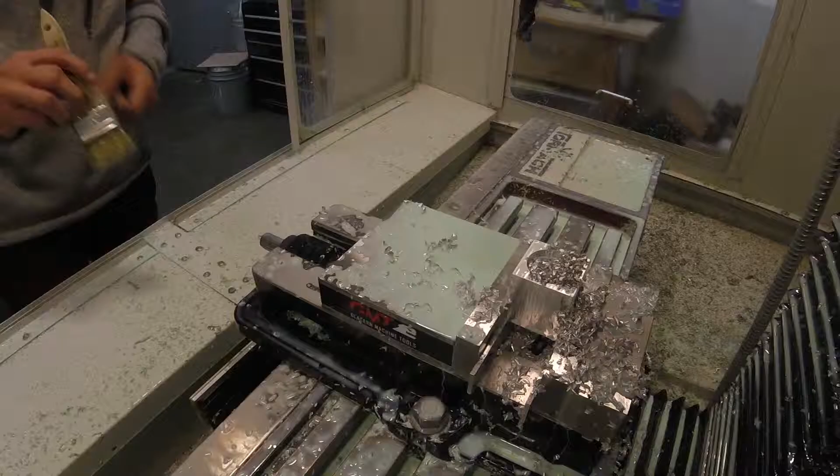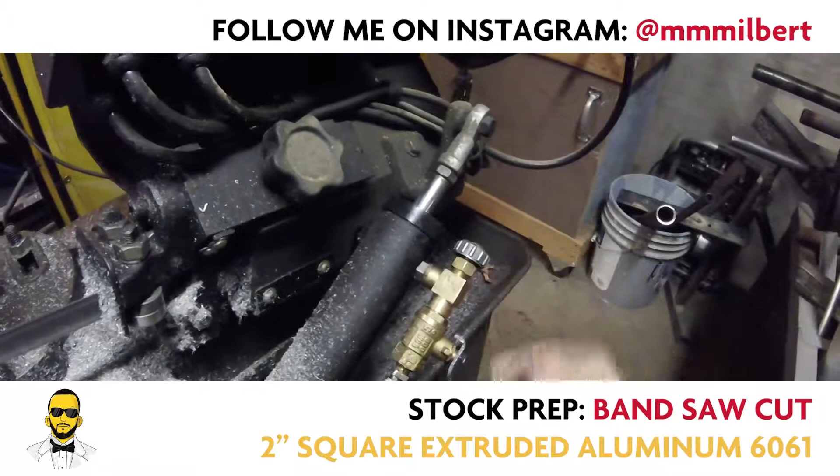Today we're in the shop milling a Turner's cube, learning how to use a CNC machine. We're on a Tormach PCNC 770. In this video, I'll share my CAD and CAM as well as my part setup, tooling, and speeds and feeds. Thanks for joining me.

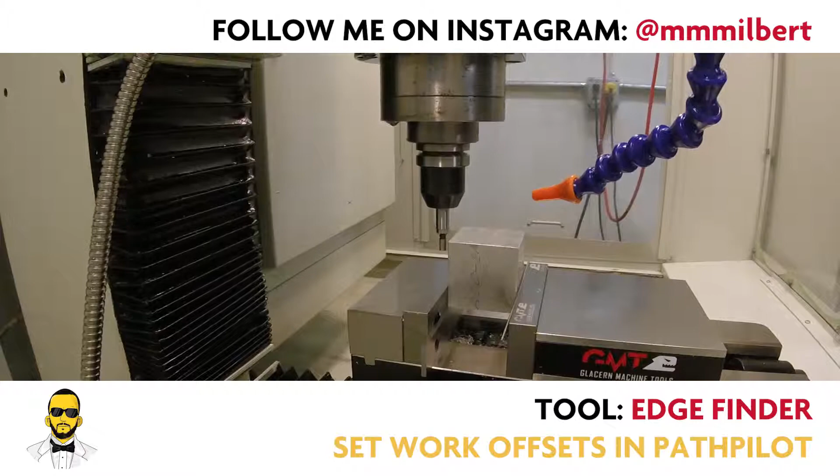I'm clamping my piece of 2-inch extruded aluminum into the vise, and I'm finding the work offset with the edge finder. I have it sitting on a parallel on one side with a piece of TIG rod on the other side, and this is a piece of advice I saw on a This Old Tony video.

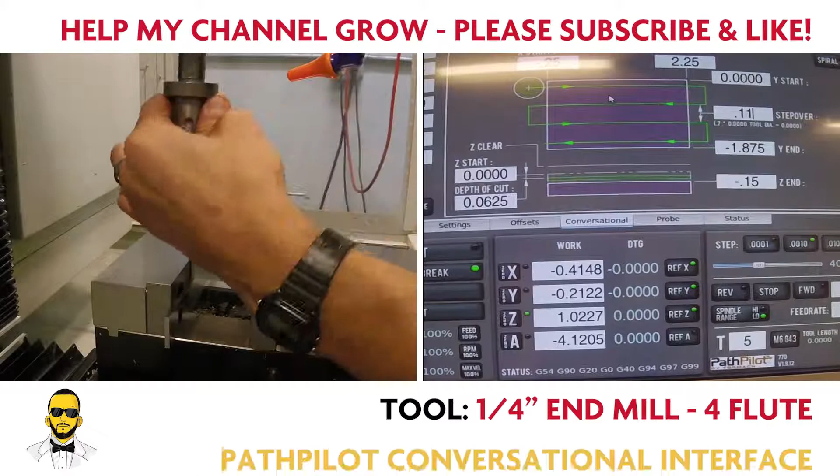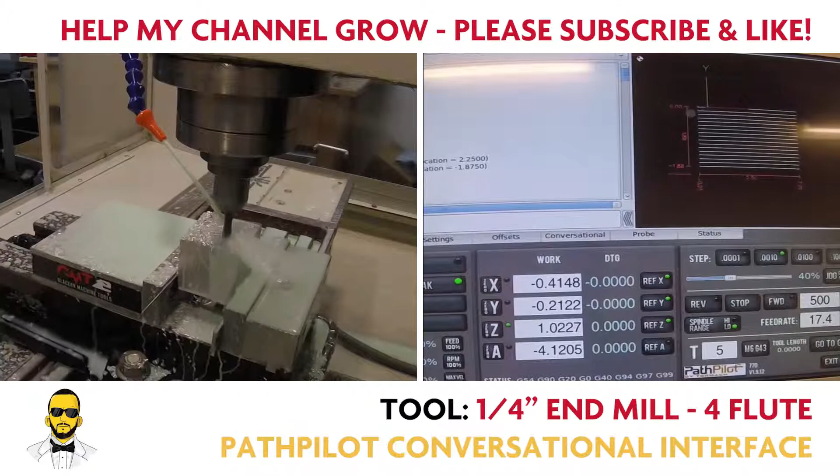I programmed the conversational interface to use the 1/4-inch end mill to face off the top of this block, and I'll do that to each of the 6 sides. For most of these operations, I'm using a 1/4-inch end mill because that's what I have. In the future, I'd love to get some other tooling like a Superfly to make a faster job and give me a better surface finish.

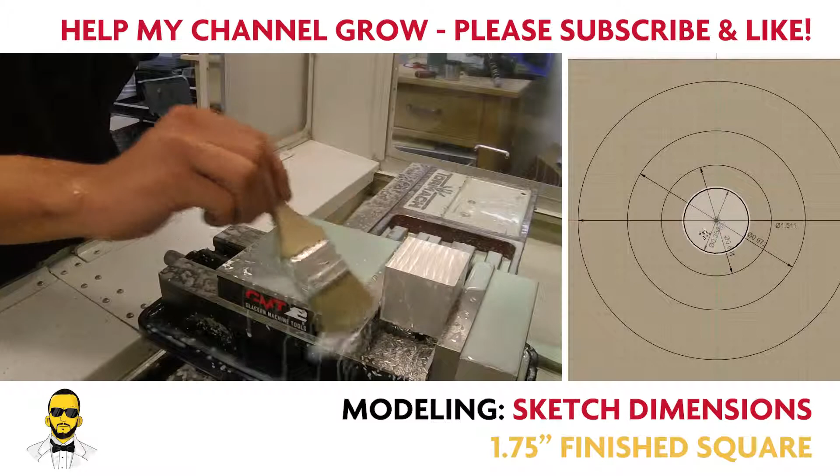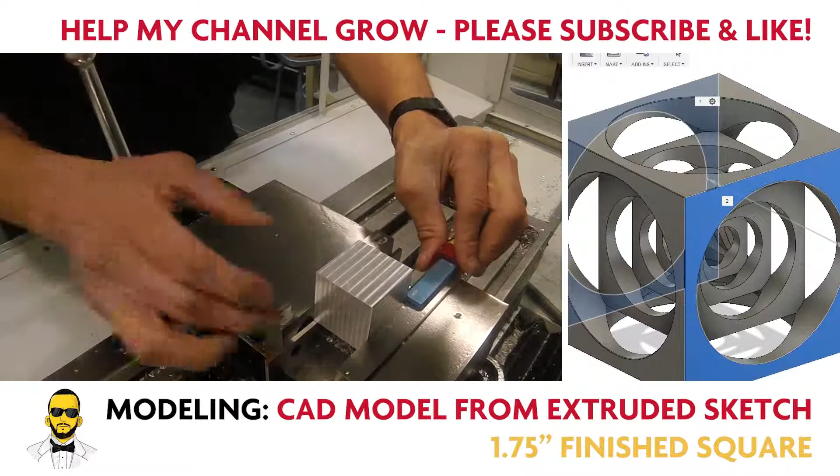I'm getting started in Fusion 360 with the sketch, and in this sketch, I just found dimensions on Google that I calculated to fit my cube size, and that's what I'm starting with. From there, I extruded the shape into all the dimensions, added some chamfers, and that's pretty much what I call my model. I'm new to Fusion 360, so I'm not going into depth on laying this out because I don't even know what I'm doing.

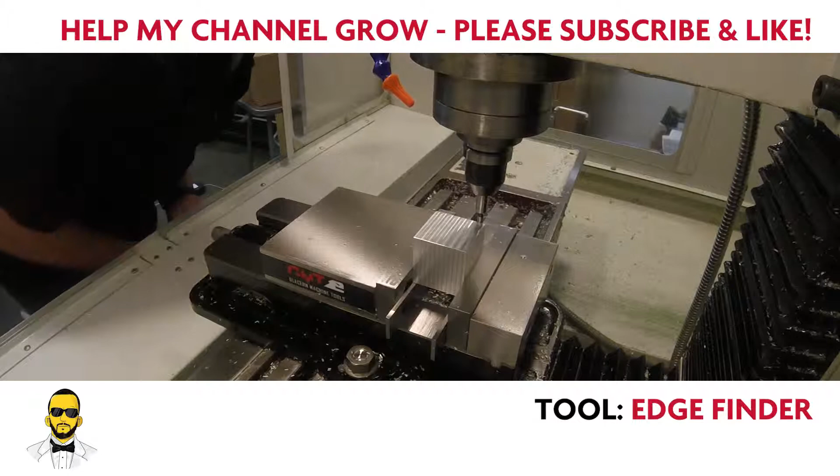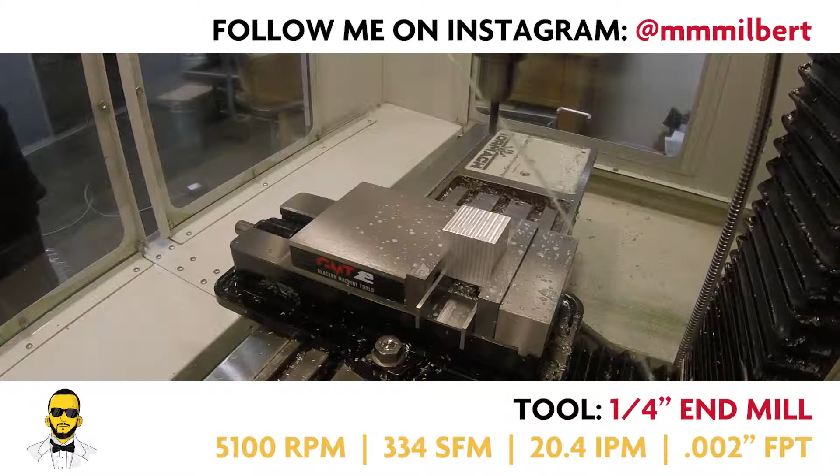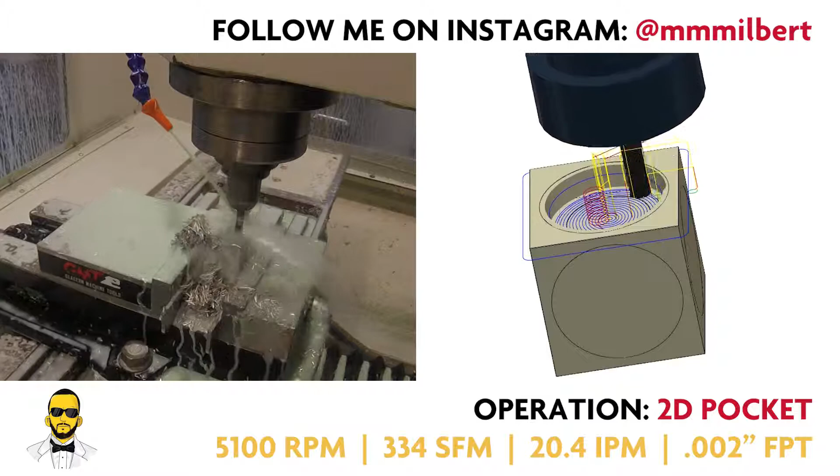All of the learning about CNC and machining that I've done has been from reading, trial and error, and watching other people on YouTube. Keeping that in mind, I'm just trying to share what I'm learning, and hopefully this will be useful to someone else.

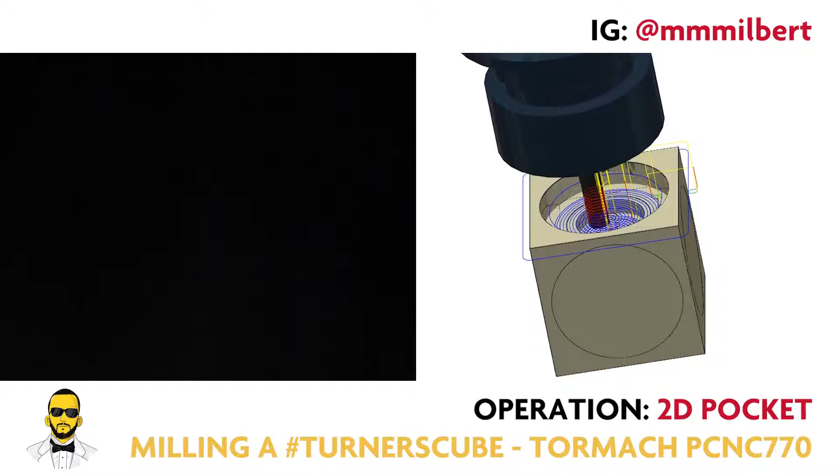We'll finish this out with the side-by-side of the cube milling on the Tormach as well as the cam in Fusion 360. What you're watching is a complete setup for milling one side of the cube. I'll repeat this for the rest of the 5 sides to get a finished Turner's cube.